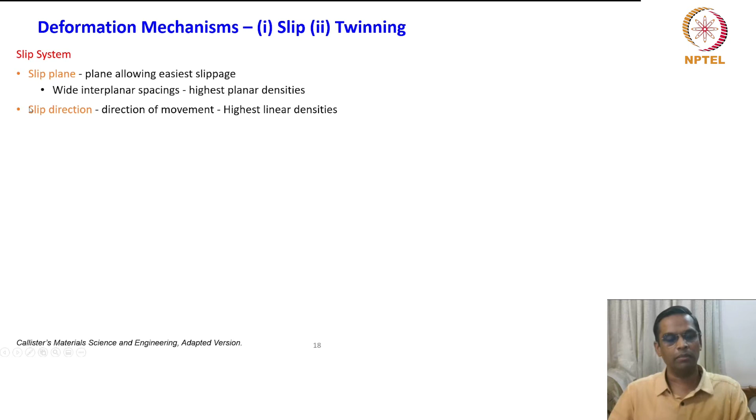Slip, in crystallographic terms, is the slipping of a large portion of crystal aggregate. The slip is described by a term called slip system. Slip system consists of two quantities. One is slip plane, a plane allowing the easiest slippage, with wide interplanar spacings and highest planar densities. These are very important requirements for easy slip to take place. And then a slip direction of the movement, with highest linear density. So a slip system consists of a slip plane and a slip direction.

Now let us look at the example of the highest dense plane. Here we have taken the face-centered cubic crystal unit cell, and what you are seeing here is the 111 plane, which we have just seen in the previous lecture called the octahedral plane, and this plane has the highest planar density in an FCC system. The pink arrows indicate the directions. You have three directions which can be easily identified from this.

If you take out this plane and put it in a planar view, this is how it looks. There are A, B, and C type of atoms, stacked one on the other. From the top view, it will all look like this: A, B, C. So FCC slip occurs on {111} planes, denoted by a flower bracket, meaning a family of planes. These are close packed planes, in <110> directions, also a family of directions, called close packed directions.

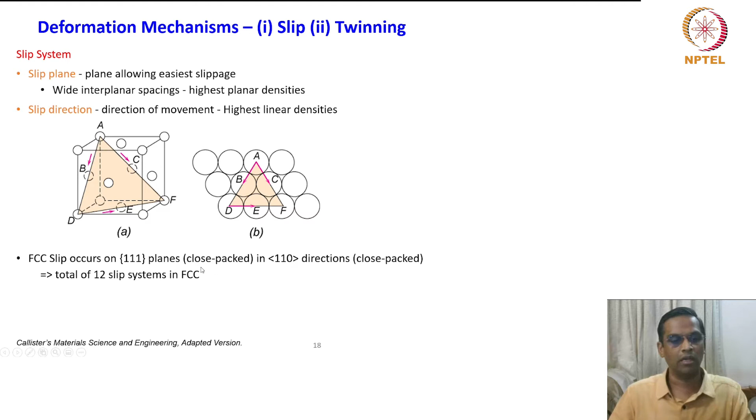There are 12 slip systems in the face-centered cubic crystal, and then we'll see how dislocation proceeds. Dislocations proceed because we are applying a load, which is measured as stress, and because of that the dislocation moves in the crystal. That is the primary action that results in the deformation.

So this is a schematic where we apply the tensile force F, and the cylindrical member is getting slipped. You can see the slipped area, and this is the slip direction, and the applied tensile stress is sigma equal to F by A, force per unit area.

And we know that crystals slip due to a resolved shear stress, tau R. We already know that a total stress can be resolved into normal stress and shear stress. So slip is caused by the resolved shear stress component of the applied stress.

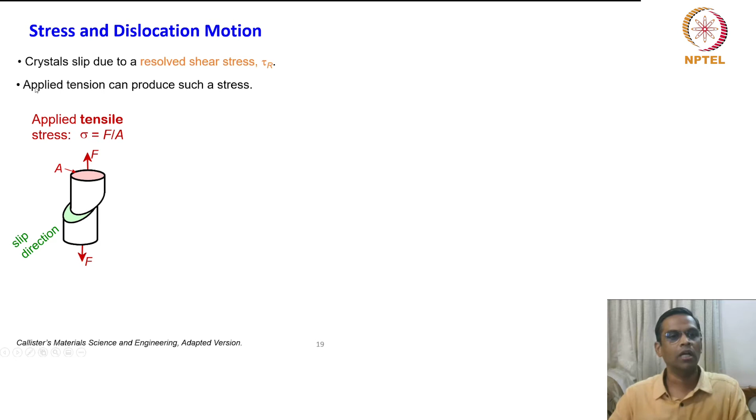So applied tension can produce such a stress, and the resolved shear stress tau R is equal to the shear force divided by the area where the shear force is acting. And if you look at this schematic, it clearly depicts the area which is subjected to the shear force as well as the plane on which the shear force is acting. And NS is the slip plane normal, just to illustrate clearly the applied tensile stress versus resolved shear stress.

And if you look at the relation between sigma and tau R, we can further expand this: tau R is equal to Fs by As. To see what Fs and As are, I need to bring a more schematic here. This is the cylindrical member which is subjected to slip, this is the slip plane, and this is the slip direction. The force is a tensile, uniaxial force, and the area of the cylinder is A. The green line is normal to the slip plane, which is kept at an angle of 45 degrees. The angle between the slip plane normal and the tensile axis is phi, and the angle between the slip direction and the tensile force is lambda.

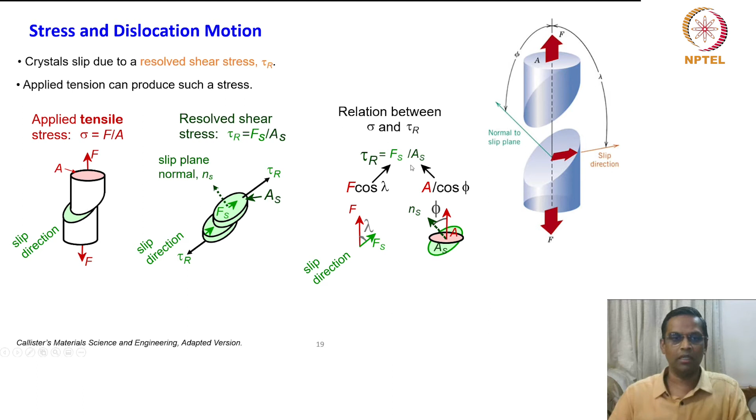Similarly, the area: this is A, the area perpendicular to the force. But the area which is actually subjected to the shear force is given by A divided by cos phi, because of this angular relationship. So if you make these substitutions, you will see that tau R is equal to sigma cos lambda cos phi. That is the relation you get between sigma and tau R. This is a fundamental requirement for slip to take place.

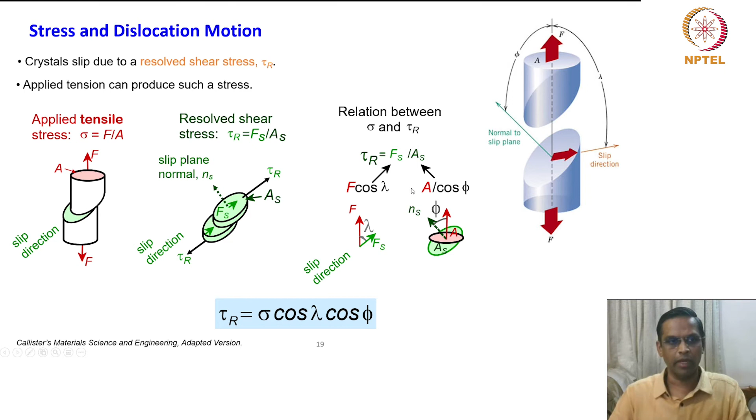It is not that a resolved shear stress of any magnitude will cause slip. There is something called critical resolved shear stress. It is a condition for dislocation motion. If you recall, we have also seen the stress required to move a dislocation, the Peierls-Nabarro equation; it is something similar. There it is assumed that the crystal is free of any other dislocation, just one dislocation in a perfect crystal. But here we are talking about a bulk. The initial condition could be of any kind, but here also it is a single crystal.

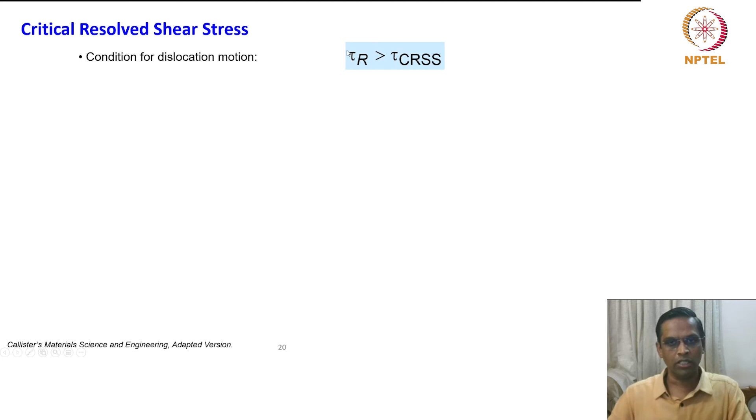The condition for dislocation motion: tau R should be greater than tau CRSS. The resolved shear stress should be greater than the critical resolved shear stress required to move the dislocation. That is how you should look at it. The critical resolved shear stress values are typically 10 to the power minus 4 GPa to 10 to the power minus 2 GPa. The crystal orientation can make it easy or hard to move a dislocation. This is very important. We will look at the details as we move along.

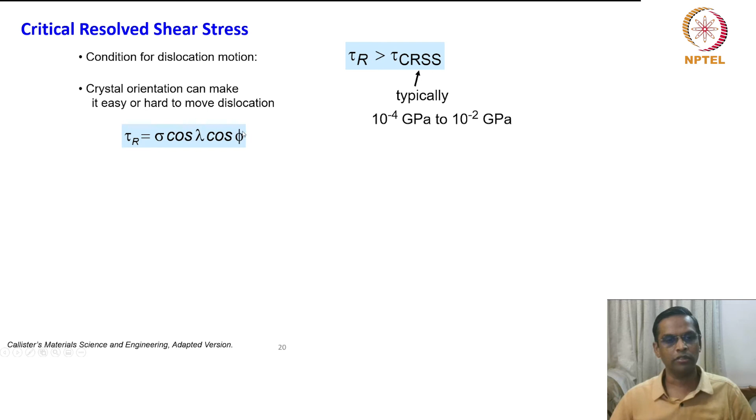And the tau r is equal to sigma cos lambda cos phi. So that clearly shows that the orientation is very important, and we will show this by some schematic to explicitly arrive at the condition of a slip.

On the other hand, if you take lambda and phi as 45 degrees, then it gives a value tau r is equal to sigma by 2. Okay. On the other hand, if you make phi equal to 90 degrees, then also tau r becomes 0. So what it means is tau maximum is at lambda and phi equal to 45 degrees.

Okay. So this is one simple substitution which illustrates the maximum resolved shear stress is obtained at the angle of 45. This we have already seen in the yield criterion. Even before that, the shear stress plane and all that we have seen several times. The maximum tau max is occurring at 45.

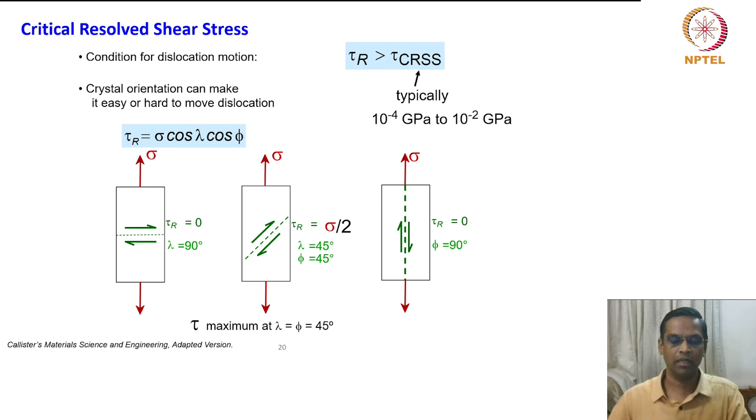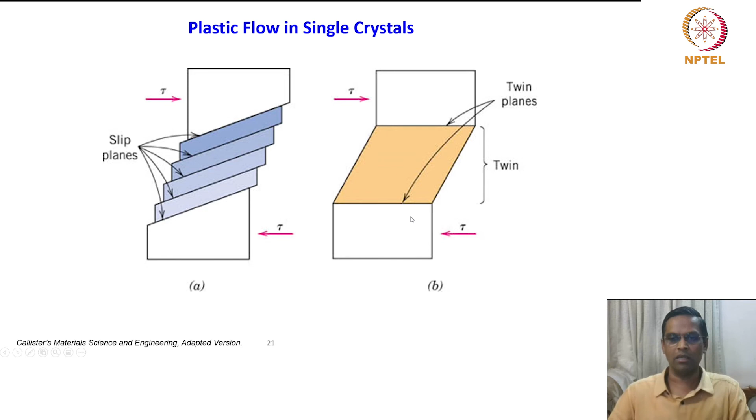So this is how the slip plane will look like, and on the other hand, the other mechanism, twin, will look like this. And we will see the details in a few minutes. But what you see here is this is an untwinned plane, and these are twin planes, and in between you have the twinned region, and these are the shear stress directions.

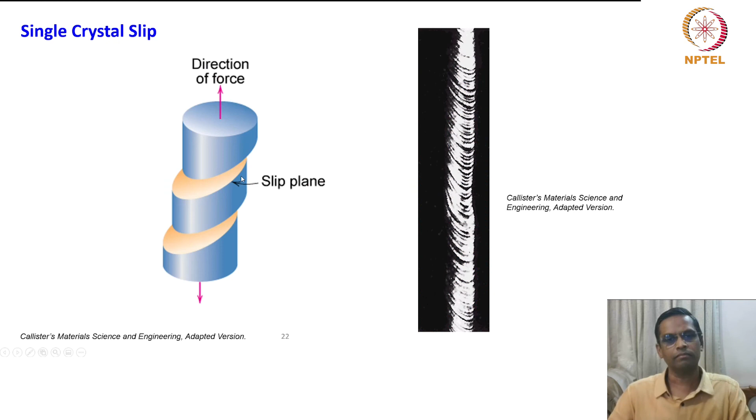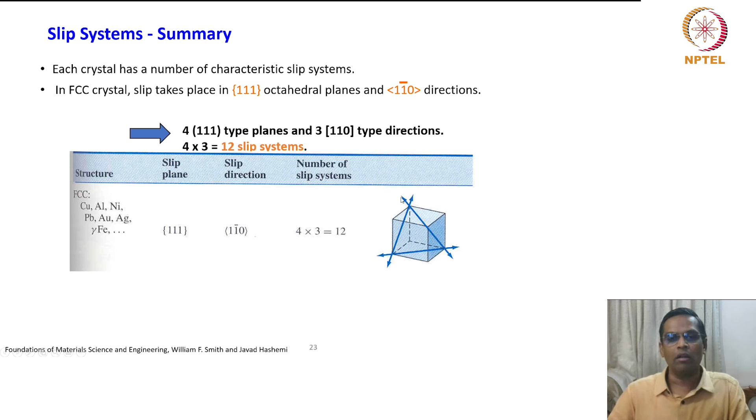Okay, so you have examples: copper, nickel, aluminum, lead, gold, silver, gamma iron, and so on. They all belong to this kind of crystal system. And if you go to the BCC crystal, that is the body centered cubic lattice, you have the 110 plane and 111 direction. This type of slip system is displayed by alpha iron, tungsten, molybdenum, beta brass.

So they have got about 12 systems, and there are other systems. 211 is a plane and 111 is the direction. This slip system is also readily active in alpha iron, molybdenum, tungsten, and sodium. So this again contributes another 12 slip systems. And the third slip system which BCC exhibits is 321 planes and 111 direction, giving rise to about 24 systems, like alpha iron and potassium.

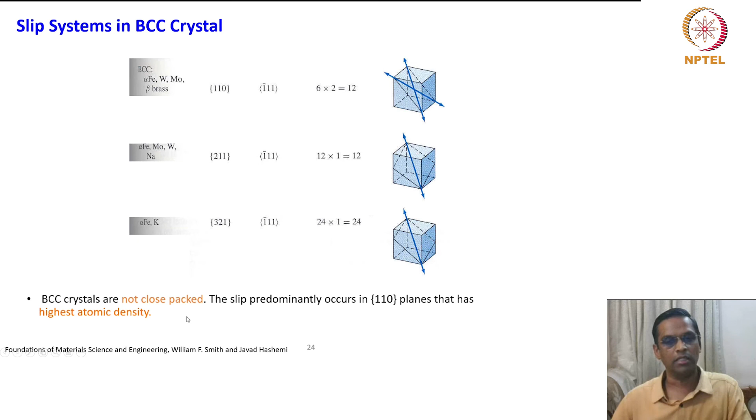So all these directions are marked here for quick reference. So if you look at the number of slip systems as compared to FCC, they are more. Okay, but the problem is BCC crystals are not close packed. The slip predominantly occurs in 110 planes that have the highest atomic density. Okay, so you have to remember that.

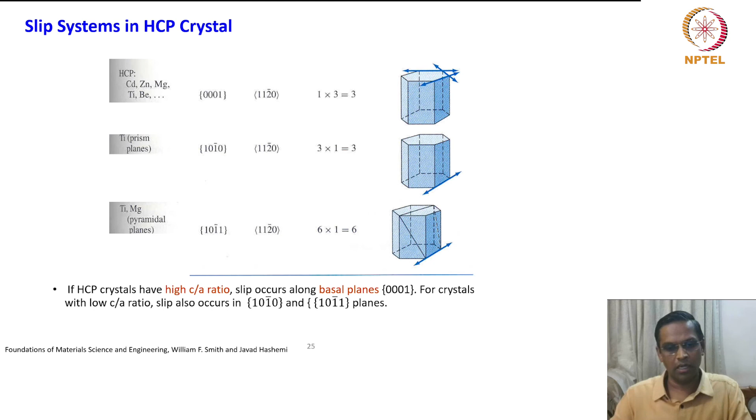But the problem with HCP is that it is very sensitive to the c/a ratio. If HCP crystals have a high c/a ratio, slip occurs along basal planes, that is 0001 type planes. For crystals with a low c/a ratio, slip also occurs on prism planes. So this is one thing we have to remember. Compared to FCC, both BCC and HCP do not have highly dense planes. That's the bottom line.

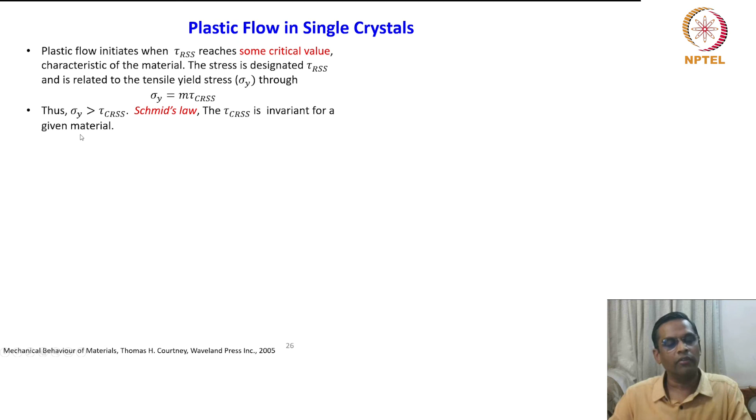If we look in a little more detail at plastic flow in single crystals, we have seen that plastic flow initiates when tau RSS reaches some critical value characteristic of the material. The stress is designated tau CRSS and is related to the tensile yield stress through this relation: sigma y equals m times tau CRSS. This is also known as Schmid's law. Tau CRSS is invariant for a given material. Its value depends on test conditions such as temperature and strain rate, as well as structural features such as the material's initial dislocation density and purity.

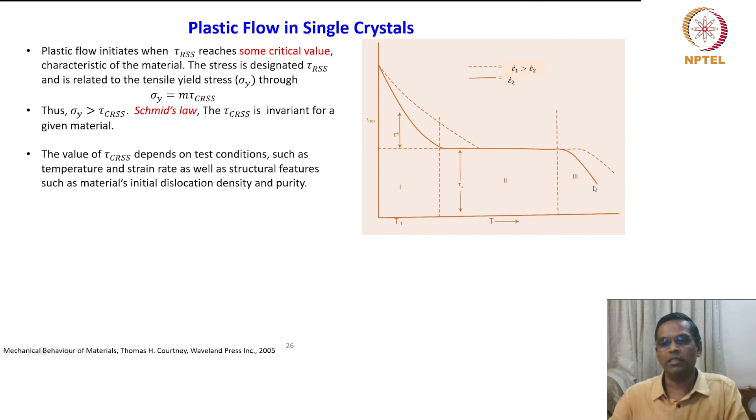So what does it show? It's very interesting actually. This plot exhibits almost 3 regions: region 1, region 2 and region 3. What are the critical points to be noted? In region 1, T is less than or equal to 0.25 Tm, and tau CRSS decreases rapidly with increasing temperature. It is also a function of strain rate, so at the two strain rates the curves look different. That means it is sensitive to strain rate as well.